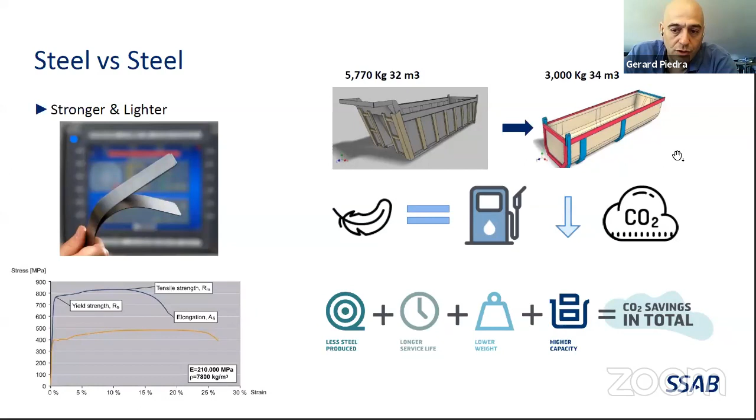Many people still think, well, it doesn't matter in my area because we can still overload, and I agree. Many areas in the world still are overloading vehicles. But that's not going to last long, I would say. The main reason is that more and more civilized places will ban overloading. And this means having an economical impact in the logistic operation and also a legal impact.

So overloading is not permitted by governments in general. And of course, you need to put yourself into the position of investing heavily in the infrastructure of a country, with roads, for instance. So therefore, that government wants to keep those roads in the best way possible, which means that overloading is also helping to destroy the roads faster. Therefore, one of the interests of the government is to keep the investments, and the second, or the first, depending on the situation, is also to keep the safety. Overloading is directly connected with a lot of accidents in the heavy transport industry.

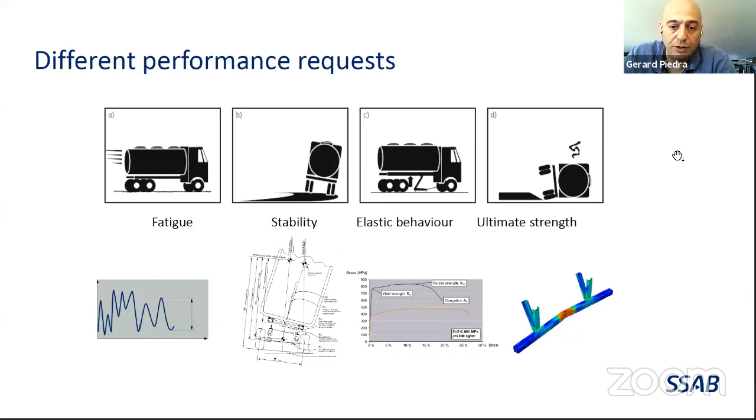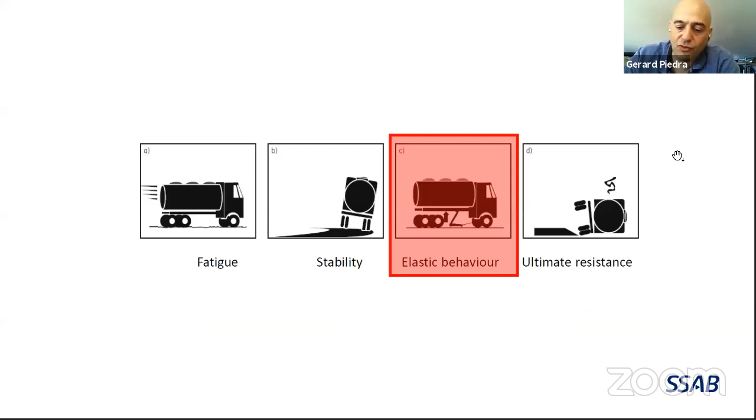What is traditionally happening in the design offices is that, well, we know very well the elastic behavior. Let's calculate, let's design according to that, and try to cover the rest by using safety factors. This is a very common practice. This normally leads us to quite over-designed components in many aspects. And this is easy to solve today, because we have a lot of tools and available knowledge to address every specific problem with the right approach.

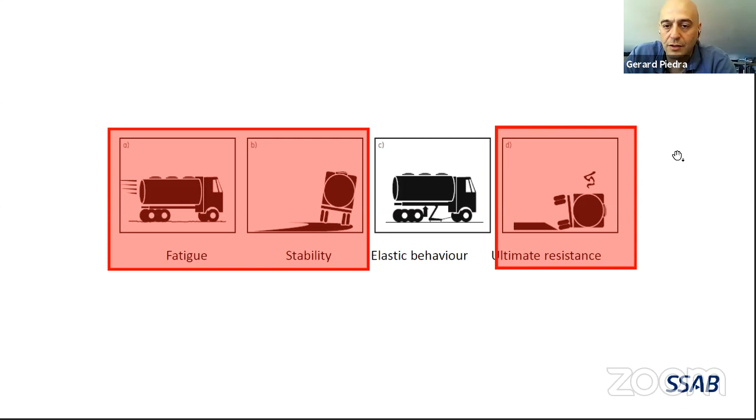I would like to introduce a bit what Hardox is and what Strenx is. The first thing you have to know is that Hardox refers to SSAB material produced for abrasion-resistant conditions. So, in theory, you should be able to solve a problem connected with wear, with abrasion, with Hardox. Hardox is not a product. Hardox is a brand name, and we have several products under the umbrella of Hardox. Different grades; every grade for us is a product. And every grade is supposed to perform best in certain working conditions.

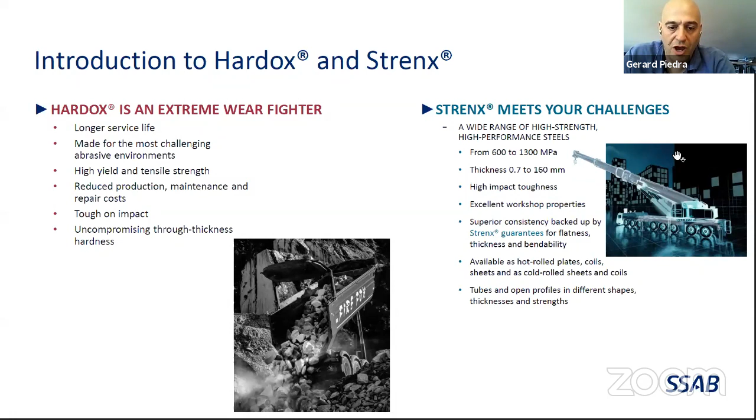Then we have Strenx. Strenx is a structural steel ranging from 600 megapascal to 1300 megapascal. This is the material that you should use for pure structural applications. What is interesting to emphasize as well is that Hardox, being a wear plate, is a quite unique combination of properties. It is not only hard, it is also very tough, which means that it's a wear plate with structural capability. This is what allows Hardox to be used, for instance, in a tipper body, as you see in the picture, with no extra reinforcements and things like that.

One important thing, only SSAB produces Hardox. For some reason, we have been very successful during the last 40 years producing Hardox, which means that Hardox has kind of become a standard name to designate wear plates in general, no matter who produced them. For your understanding, Hardox is not a general name, it's a brand name.

Hardox is only produced by SSAB, and only Hardox can guarantee outstanding precision, tolerances, flatness, impact resistance, predictable lifetime, uniform wear, and so on. One very important thing to pay attention to when you are buying your wear plates is that the supplier can guarantee the hardness level through the thickness. That's very, very important. And we, of course, guarantee this and many other technical properties of our materials, and therefore take responsibility for that.

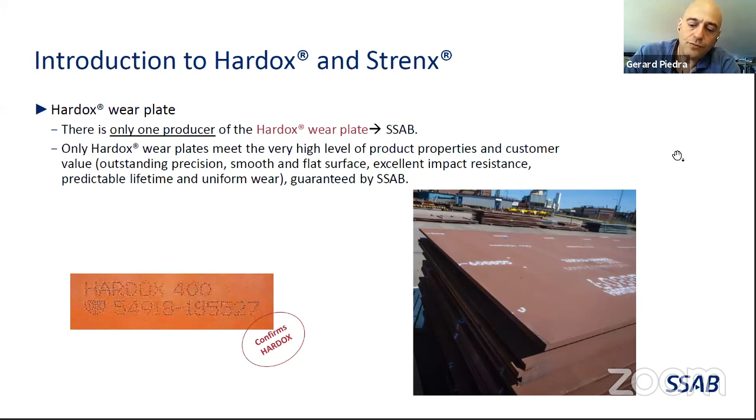Okay, I said there are multiple grades, therefore multiple products under the umbrella of Hardox. If you look at our website, you will see quite a lot of them. The first question is, well, I'm in the transport industry, I'm producing tippers or trailers, this type of vehicles. Which grade should I focus on? Which ones are interesting to me? The answer is relatively simple. I added in this slide the 3 basic grades you should pay attention to. There could be other grades of interest for more specialized applications, but in general, with these 3 grades, you will be able to cover 90% or 95% of the expected applications.

The first one that you can see here is Hardox 450 CR. CR stands for cold rolled. And as a cold rolled material, the thickness is quite thin. It goes from 0.7 to 2.1. So this is basically a very thin Hardox. You can see on the right an example of application. It comes from Turkey, a company called Fesan, and they are producing these drop side trailers, in which the sides that you are able to open are less than half the weight of a mild steel version. So they save more than half of the weight of the traditional solution in the market. So it's extremely light, but at the same time much stronger than the mild steel version.

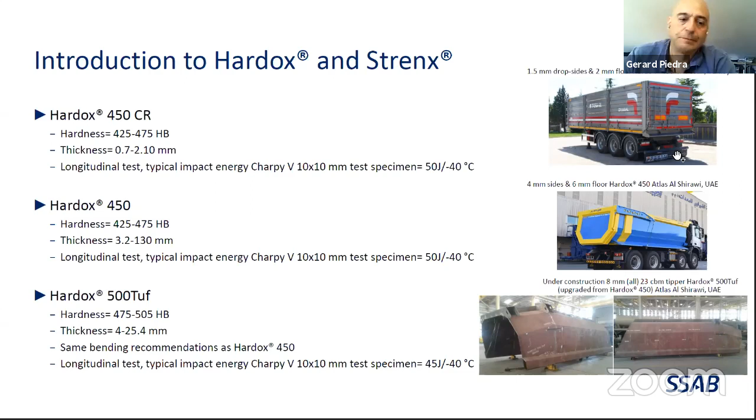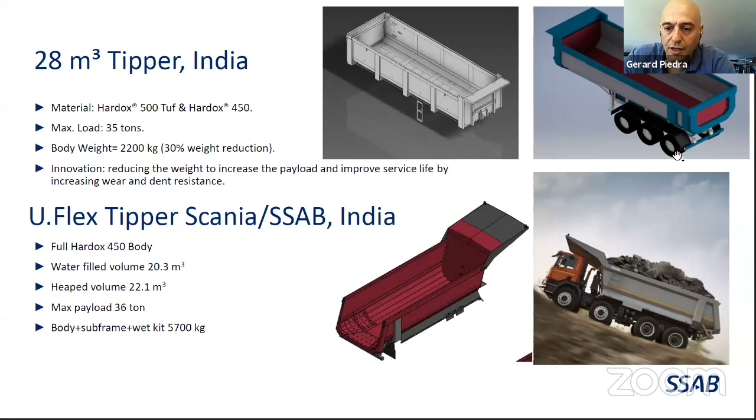If we look down, we see the U-Flex tipper Scania SSAB project in India. This is a rock body off-road truck. This is supposed to be used in heavy-duty mining applications. And you see here that it is a 20.3 cubic meter water fill capacity, or heap volume 22 cubic meter, 36 ton maximum payload. The weight of the body, the subframe, and the wet kit is 5.7 ton. This has been already operating in India long enough to know that it is a perfect match for the operations, and everyone is extremely happy with the performance.

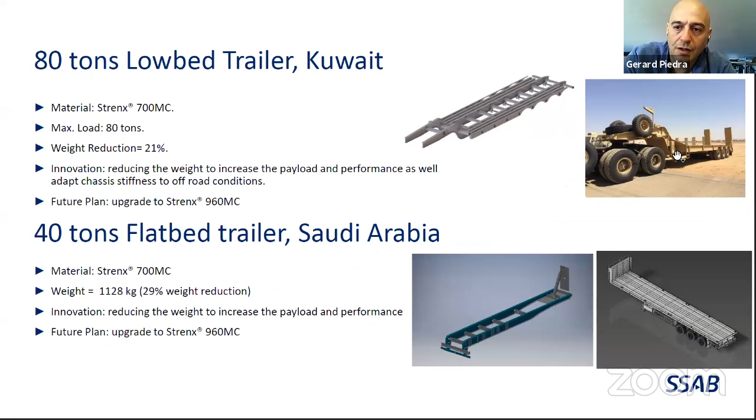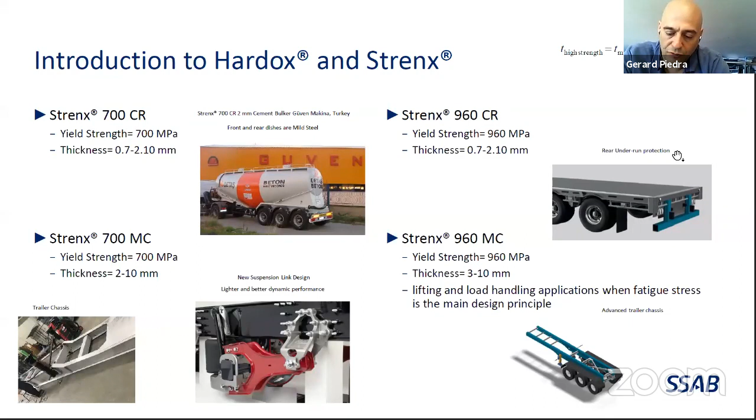If you are using a material that is in the level of S355, then the weight reduction easily goes into the level of 30%. I just wanted to comment this detail because many people are having these questions, and it's a very fast way, without going complex with simulations and finite element tools and things like that, to have a fast overview on weight reduction.

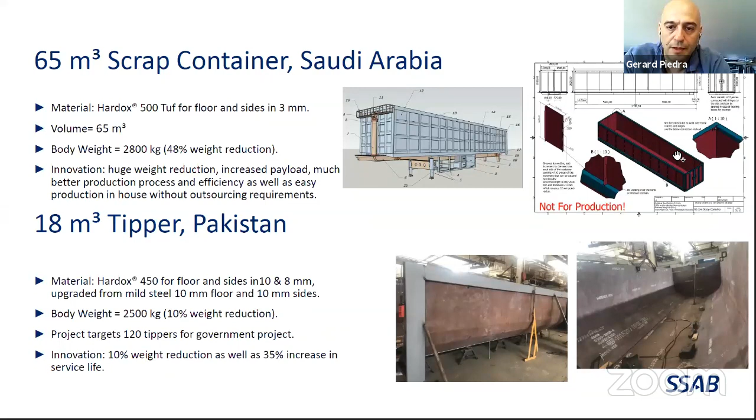Then I would like to see a little bit of opportunities for the friends that are joining from different areas that are not the trailers and the bodybuilders. For instance, the truck industry. The truck industry has stringent demands in terms of safety for cabins, and we have been very active with different OEMs in Europe, in the truck industry, in order to make safer cabins.

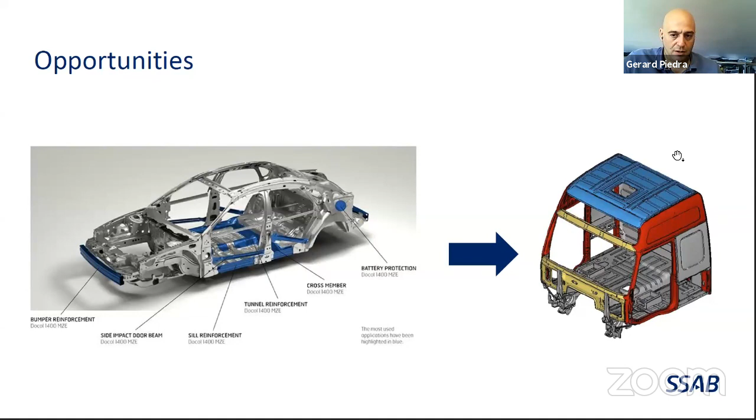And this knowledge is very much matching for us, because we have a division in SSAB for automotive materials connected with energy absorption and crash management. So we actually learn from that experience in the automotive industry, and can transfer a lot of knowledge into the truck and heavy transport industry. So cabins could be a nice opportunity. Wheels could be a nice opportunity.

This picture here reflects that a forged aluminum wheel is roughly half the weight of a traditional steel wheel for a commercial vehicle. I'm pretty much convinced, and we have been running several projects with different customers, that it's possible to create a steel wheel with advanced high-strength steels that is probably not matching the aluminum wheel, but maybe only 20, 25 or 30% heavier than the aluminum wheel, with the advantage of cost compared to the aluminum. Then, of course, cross members in the truck industry, that's a nice opportunity, as well as the longitudinal beams in the chassis.

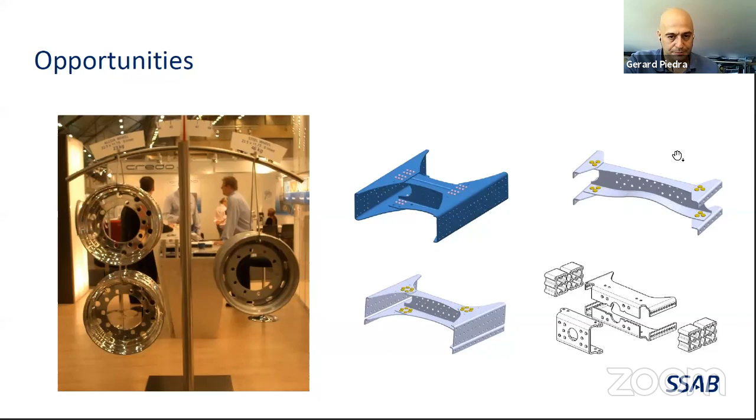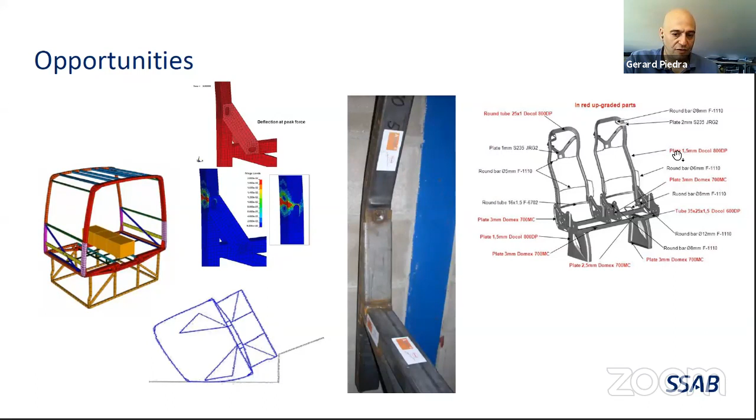Bus body components, the safety frame in the bus body, with a higher demand, at least in Europe, according to the R66, connected with the rollover and the safety space for the passengers. High-strength steel is very suitable for this. And also, why not? For instance, we have done projects with bus seats. The steel structure of the seat can actually decrease the weight easily 20, 30%. And a seat in a coach or in a bus is repeated 40, 50 times. So that's a quite interesting weight reduction.

I would like to go a little bit through some economical aspects, and that cannot be very deep. We don't have a lot of time. But one of the things I've seen from India, I've been traveling in India only 2 years right now, and I learned a lot. And one thing that I'm detecting is that, well, a more professional logistic operation is expected.

Today, as far as I know from different inputs, the logistic market in India is very much based on small owners, small companies, maybe having 1, 2, 3, 5 trucks, and the big logistic operators are less common. So maybe the ratio follows a Pareto law. 80% of the market might be small owners and 20% of the market might be big operators. But this is changing. And we expect the Indian market to have more specialized logistic solutions and more professional logistic operators.

I was also having the input that in a few years, maybe the Pareto law will be the opposite. Maybe 80% of the logistic operators will be big logistic companies, very much professionalized, and only 20% will be small companies, small truck owners. That for sure will promote a mindset evolution from cost to investment.

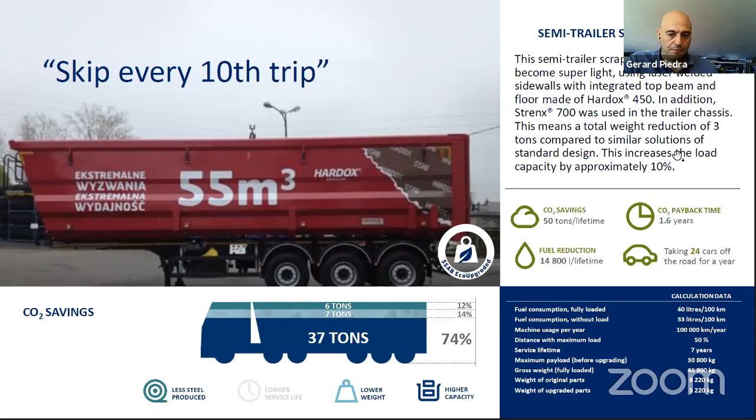Many people still want to have a picture of, okay, what is the cost situation with high-strength steel? And certainly high-strength steel, if you analyze cost per kilo, cost per ton, is a more expensive material because it's a higher performance material. But you always need to look at the complete picture. With the right design, with the right material selection, and with the right production process, you can migrate 100% a vehicle like this, the first example I show in this presentation, from conventional steel to Hardox, and still be at the same cost level, or in this case, even a cheaper manufacturing cost level.

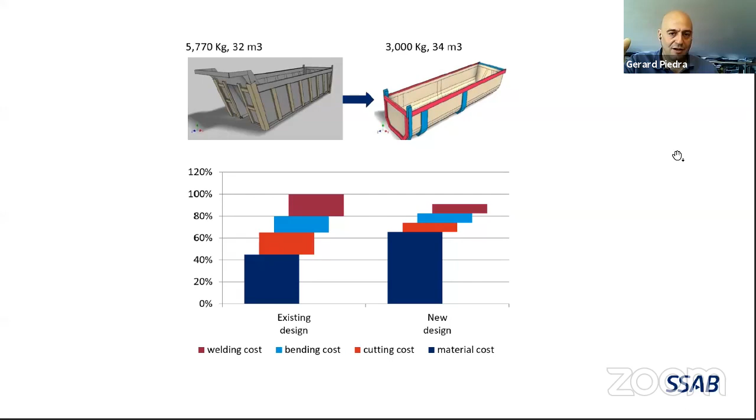Because in the total cost picture, the material is one component, but the process connected with handling, cutting, bending, welding, is also a big portion of the cost. And only the right material with the right design can give the best performance.